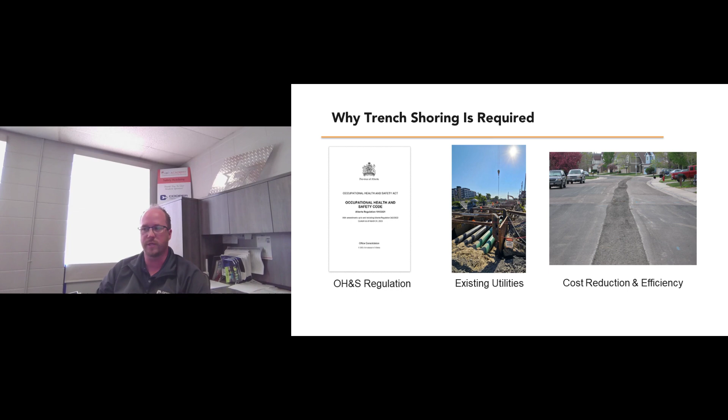Number two, existing utilities and structures. With existing buried utilities, sloping the excavation walls is not always possible without risk of damaging existing infrastructure. And three, cost reduction and efficiencies. Reduce the remediation and transport costs with a straight cut trench compared to an open cut. This may allow you to save costs on fuel, labor, equipment wear and tear, and asphalt.

Trench collapses are considered to be the most dangerous types of construction accidents. When the proper protection measures are not used to prevent a trench collapse, workers can sustain serious and life-altering injuries or even death. I'd like to note a few incidents across the country, with some close to home, where workers have been severely and fatally injured. As employers, we need to ensure that workers are aware of their rights, and working in an unprotected trench must be refused. So we'll get into it here.

August 8th, 2022, two workers died and two others were injured following a trench collapse at a construction site in Ontario. October 30th, 2018, an incident left one worker fatally injured in Edmonton. The worker was inside a trench greater than 3 meters deep by 6 meters wide, working to level it. However, the south bank gave way, covering the worker to their neck.

On June 9th, 2023, around 10:45 a.m., first responders were called to an alley in Calgary after a large amount of earth and a retaining wall of cinder blocks buried a man who was on a ladder doing a sewer line repair in a 3 to 6 meter deep trench. July 13th, 2023, two workers were injured in a trench collapse at a residential construction site on Vancouver's west side.

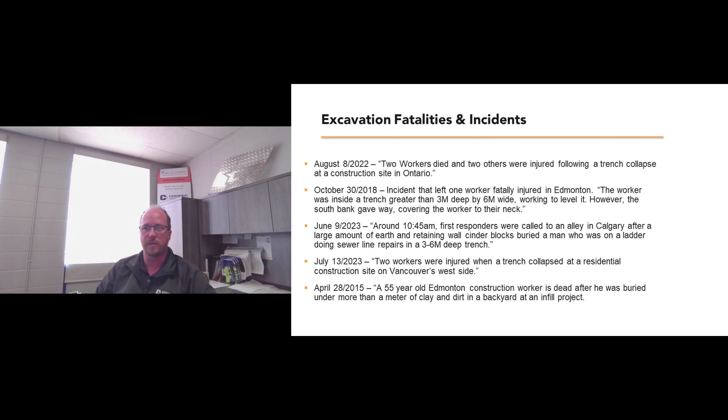And on April 28th, 2015, a 55-year-old worker in Edmonton died after he was buried under more than a meter of clay and dirt in the backyard at an infill project. So obviously, people taking unnecessary risks resulted in injuries and fatalities.

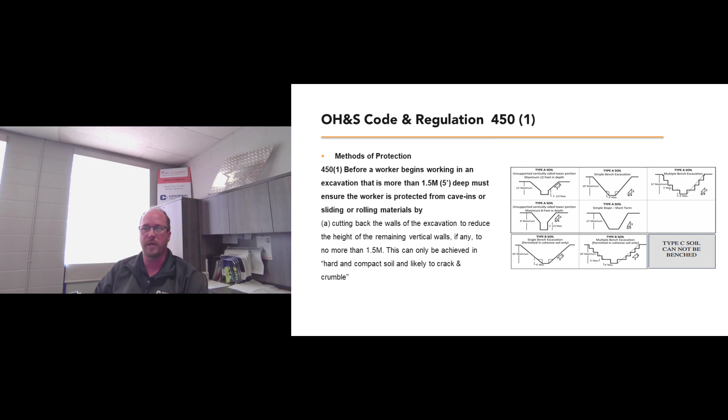So getting into the OH&S code regulation, 450-1, methods of protection. Before a worker begins working in an excavation that is more than 1.5 meters deep, must ensure the worker is protected from cave-ins or sliding or rolling materials by either A, cutting back the walls of the excavation to reduce the height of the remaining vertical wall, if any, to no more than 1.5 meters. This can only be achieved in hard and compact soil or likely to crack and crumble.

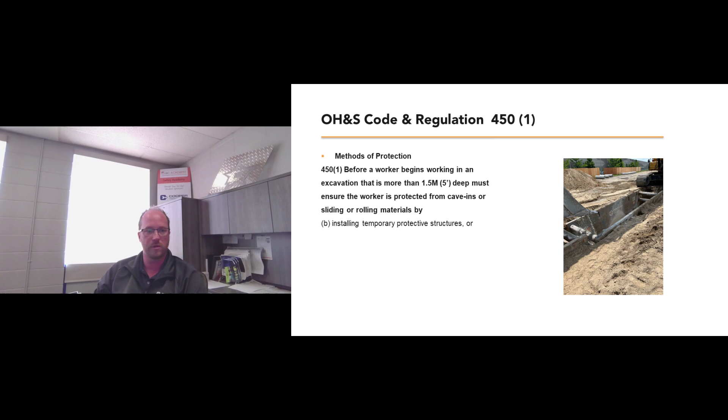Option B would be installing a temporary protective structure, or C, using a combination of the methods in both clauses A and B. So when using a combination of protective structures and sloping, ensure the trench box extends at a minimum 18 inches above the toe of the slope, and the spoil pile at least 1 meter away from the edge of the excavation. This is to prevent any roll-off material from entering the excavation.

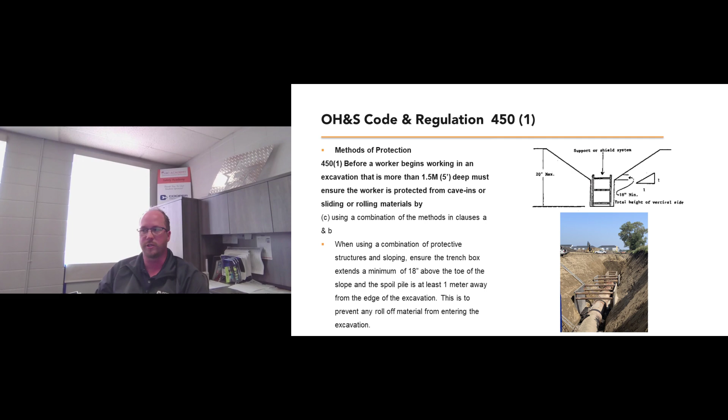Just please note, excavation regulations vary from province to province. So refer to your government regulations where your project is situated. We'll get into classifications of soil. OH&S Code Regulation 442, hard and compact. So the description on that is hard in consistency and can be penetrated only with difficulty by a small sharp object, is very dense, appears to be dry, no signs of water seepage, and has not been excavated before.

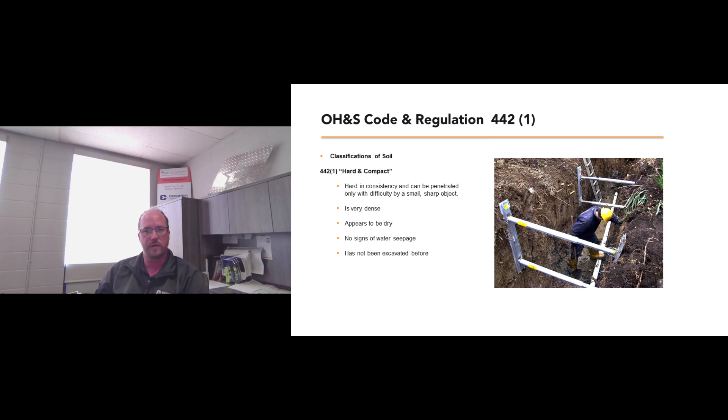Classification 442-2, likely to crack or crumble. Description: has been excavated before, but does not exhibit the characteristics of soft, sandy, or loose soil. Stiff in consistency and compacted. Has low to medium natural moisture content and a damp appearance after it has been excavated, and exhibits signs of cracking and localized water seepage.

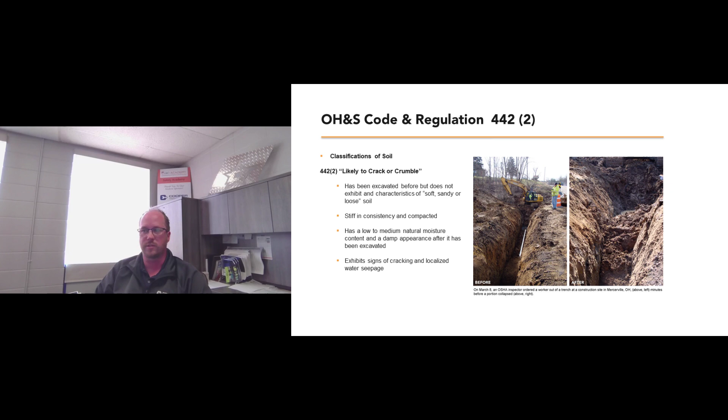442-3, soft, sandy, or loose, is firm to very soft in consistency, loose or very loose, solid in appearance, but flows when it becomes unstable when disturbed, runs easily into a well-defined conical pile when dry, appears to be wet, granular below the water table unless water has been removed, exerts substantial hydraulic pressure when a support system is used.

So when we take a look at these descriptions and relate them to the tabulated data that we provide as a supplier, we start to see some discrepancies when it comes to the definitions. In the US, they have a standard soil classification across the country. Then the manufacturers work to create their tab data. In Canada, the soil descriptions and classifications can vary from province to province. So the common type that we as a supplier defer to is a C-type soil. That's not knowing any parameters of your job. We will automatically look at a C60 type soil on our tabulated data.

It's important to note that inspections of excavations, adjacent areas, and protective systems shall be completed by a competent person on a daily basis to look for evidence of a situation that could result in a cave-in. Inspection should also be performed after a rainstorm or other hazard-increasing occurrence.

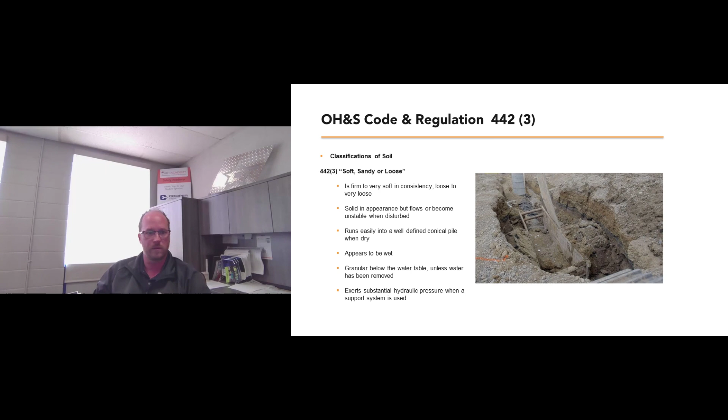Temporary protective structures, 456. An employer must ensure that a temporary protective structure in an excavation, A, 3 meters deep or less, is of sufficient strength to prevent the walls of an excavation from caving in or otherwise moving into the excavation. Or B, more than 3 meters deep, is designed, constructed, and installed in accordance with the specifications of a professional engineer.

I spoke with OH&S on this topic here on 456.1a on how they come to the determination of sufficient strength. And they came back to me that they would refer to the Schedule 9 shoring dimensions chart in the Alberta Occupational Health and Safety to determine if that shoring system is of sufficient strength.

For documentation on an engineered system, always have the tabulated data for the trench box or shoring system on hand, as it provides a number of details on the specifications of the system. You'll have a serial number, each tabulated data sheet specific to the serial number, so ensure that they match. You'll have a model number, which describes the dimensions of the trench box, typically height times length. You'll have a maximum depth chart, trench box depth rating by soil type.

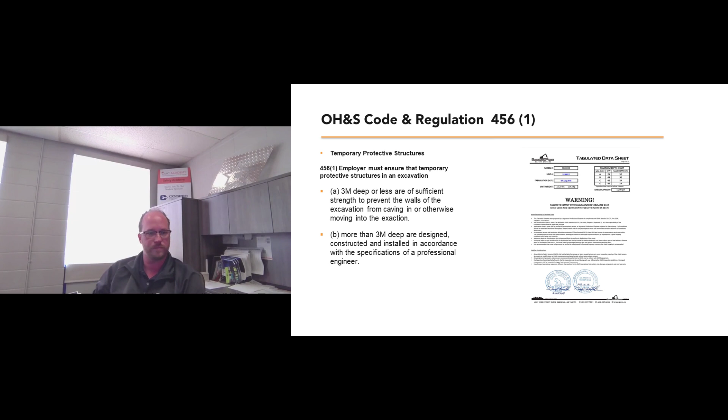When we talk about temporary protective structures, we consider two different methods, shielding and shoring. Shielding means a structure that is able to withstand the forces imposed on it by a cave-in and thereby protect the workers within the structure. Basic installation is to excavate the trench and then install the trench shield.

A couple key notes: in a dragging application, the max distance between the outside of the trench shield wall and the edge of the excavation should be no more than 6 inches. In the event of a cave-in, you want to ensure you limit the lateral movement so it doesn't pose a risk for the workers inside the trench. Secondly, if the trench box is to remain stationary, it's recommended that the trench shield be backfilled 2/3 to prevent any lateral movement.

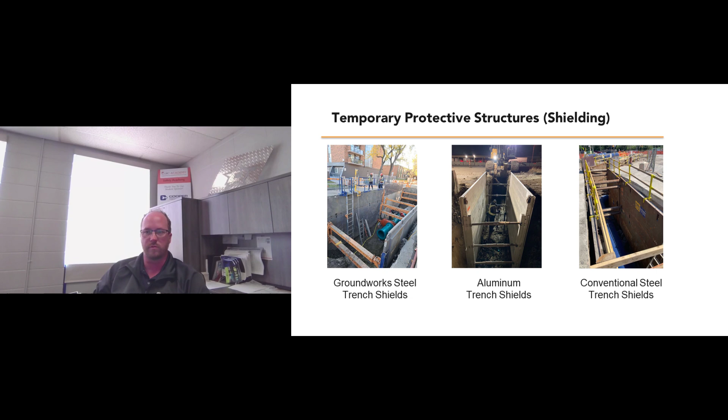Shoring means a structure such as a metal, hydraulic, mechanical, or timber shoring that supports the sides of an excavation and which is designed to prevent cave-ins. Under 458.1, an employer must ensure that a worker who installs shoring, stringers, or bracing uses a ladder and works down from the top of the trench, installing each brace in a descending order. 458.2: the employer must ensure that a worker who removes shoring, stringers, or bracing uses a ladder and works upward from the bottom of the trench, removing each brace in an ascending order.

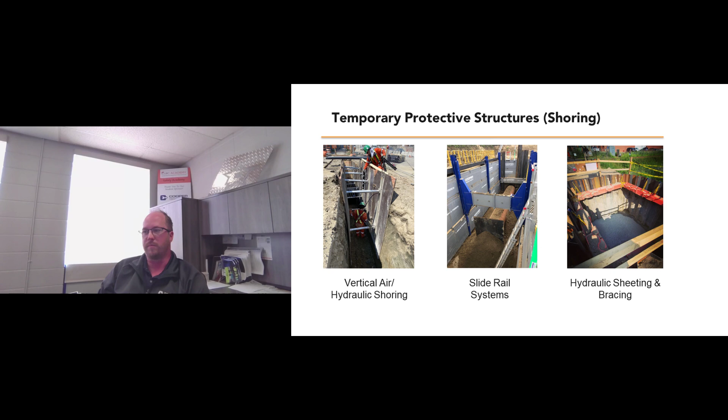Slide rail systems and sheeting and bracing installations follow the same method. We excavate inside the systems by pushing posts and panels down or adding rings of bracing as we descend to the final depth. In addition to not allowing the excavation to cave in, we also limit the soil disruption outside the excavation. For removal of these systems, we reverse the installation method by backfilling and ascending the shoring system.

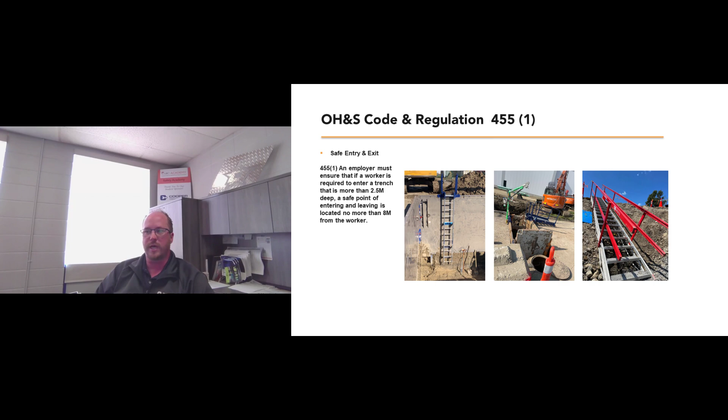OH&S Code Regulation 455-1, safe entry and exit. An employer must ensure that if a worker is required to enter a trench that is more than 2.5 meters deep, a safe point of entering and leaving is located no more than 8 meters from the worker. Just to highlight a few equipment alternatives or suggestions that we might have: temporary stairs designed to provide safe entry in an open cut excavation with handrails and non-slip stairs. Stairs into shoring systems can also be facilitated. And also vertical ladder systems clamped onto the trench box with options to add catwalks to bridge gaps up to 10 feet.

So we'll get into the products available in the trench supplier world. An aluminum trench shield is used in shallower excavations or when machines are restricted by weight capacities. These boxes can be pre-assembled and lowered into the excavation or assembled and installed as you excavate. It's a common product used when hydrovacing, as you can add panels as it's being lowered.

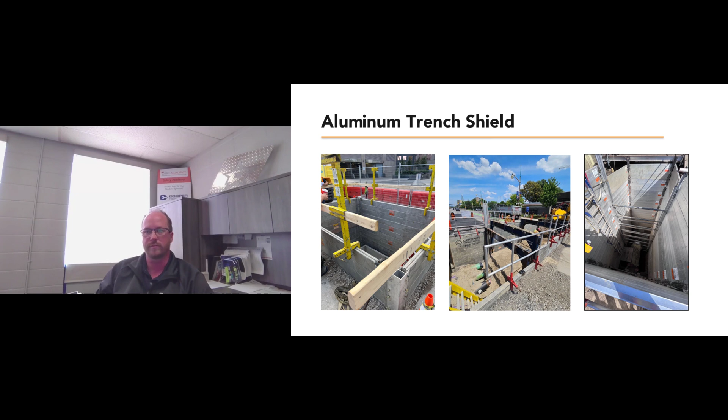Steel trench shield. Steel trench shields come in many different variations and configurations to meet your application. Depth, pipe diameter, weight restrictions, and site conditions will factor in when determining the right trench box for your application. Pipe clearance of up to 10 feet for box culvert or large diameter pipe installation, and gated panels to shore the end walls around existing pipe are all available.

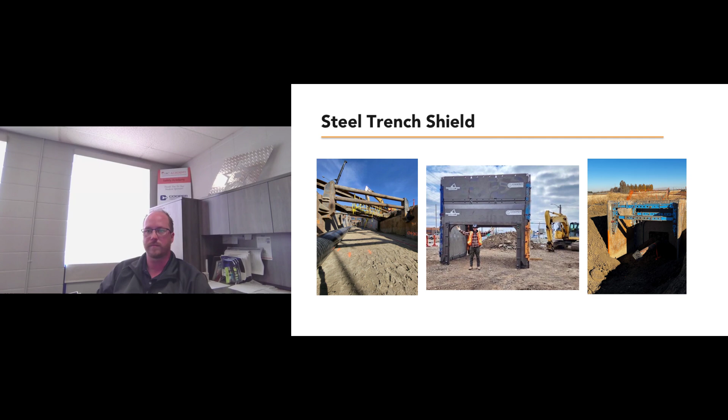Slide rail systems. Slide rail systems have become a key product in the marketplace that provide protection for the worker along with reducing the footprint of excavations. With more utilities being installed through trenchless methods, slide rail has seen its benefits in bore and receiving pits, along with deep excavations for lift stations, manholes, and pipeline integrity digs. With a review from our engineers, these systems can be utilized in excavations with a surcharge load for rail and road traffic, building foundations, or hydrostatic pressures from a high water table through a site-specific plan.